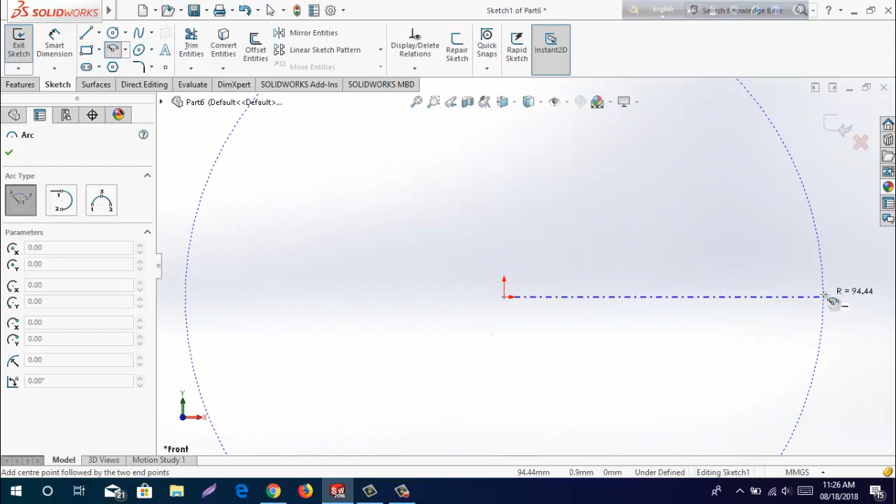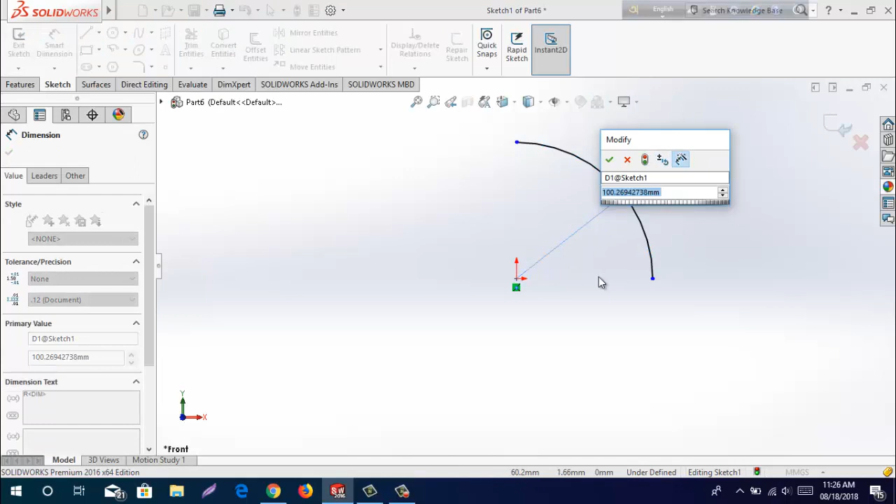Now we are going to draw an arc. Select center point arc and select the origin point, and we are going to make the arc from here to here. Select smart dimension and keep the dimension of this arc 120 millimeter, then select OK and sketch out.

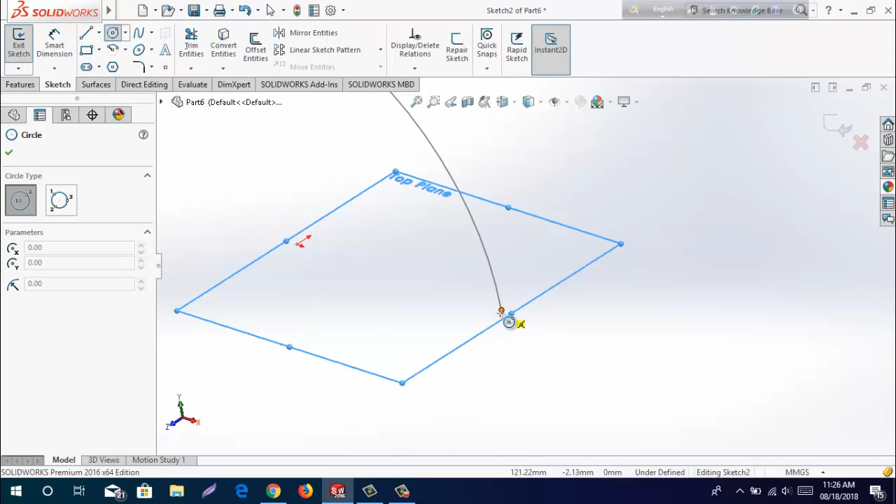Now select top plane and sketch. Draw a circle: select circle and select this point and make a circle. Put the dimension, so select smart dimension and keep the diameter of this circle 60 millimeter. Now OK and sketch out.

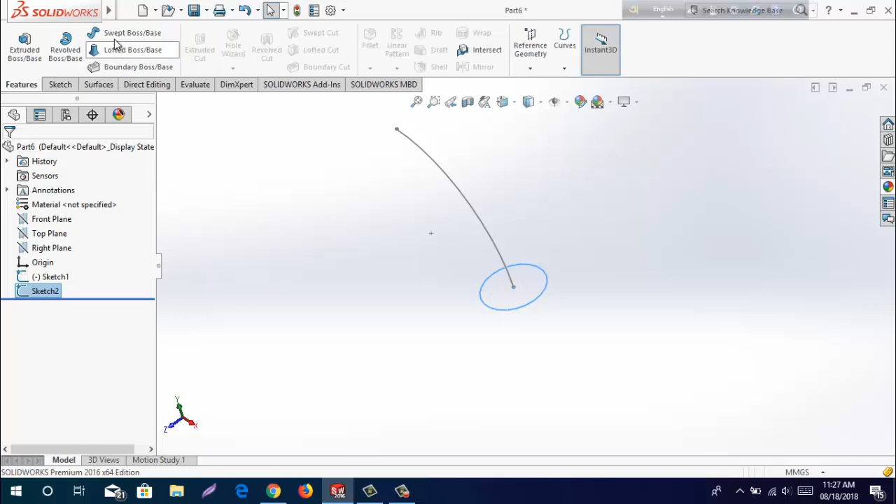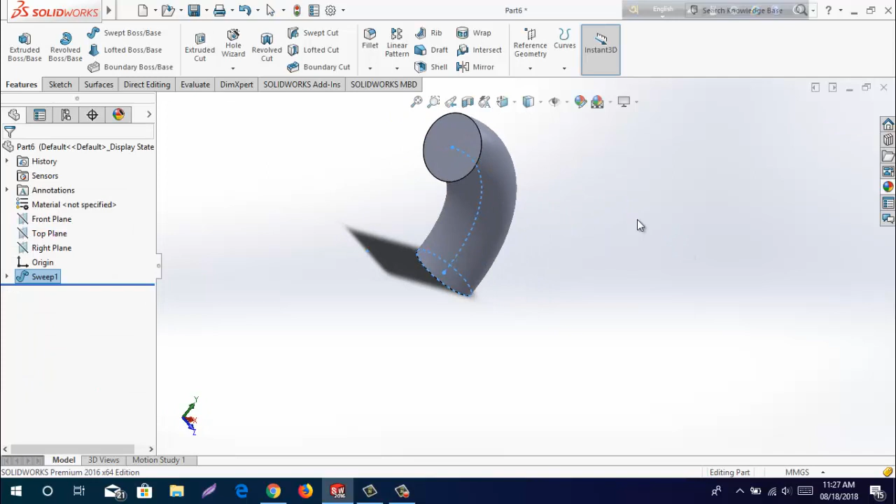Now from feature select swept boss and base, and see the circle is automatically selected here. From the second option select path, and we are going to select the arc, and see our body is almost ready. Now we need to shell the parts.

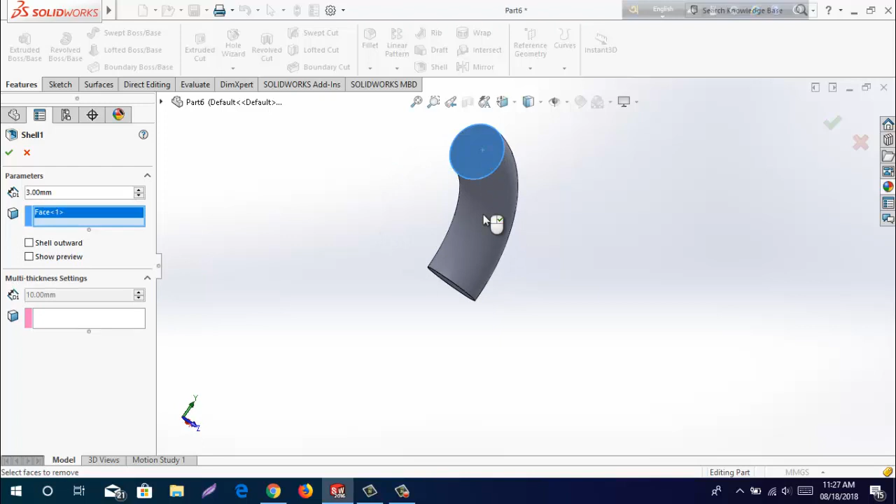Select shell from here and keep the parameters 3 millimeter, and select the faces we are going to shell. So select this face and this face. Now select OK.

Now see, our elbow is almost ready.

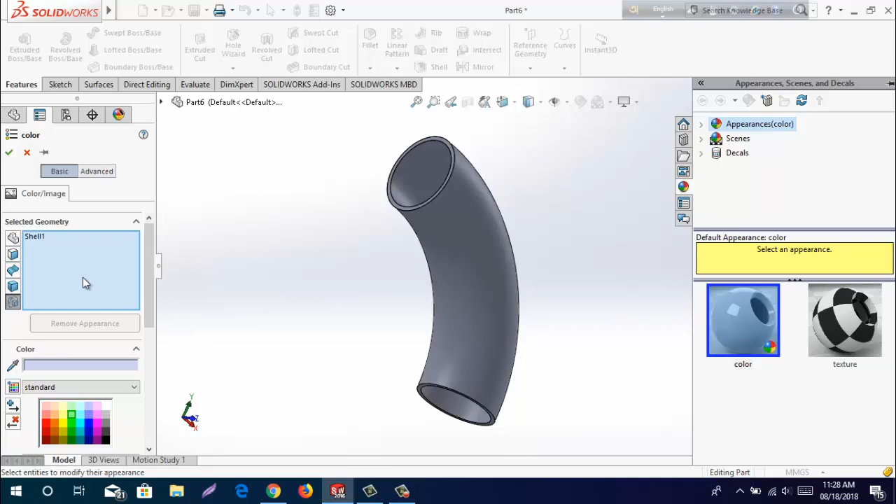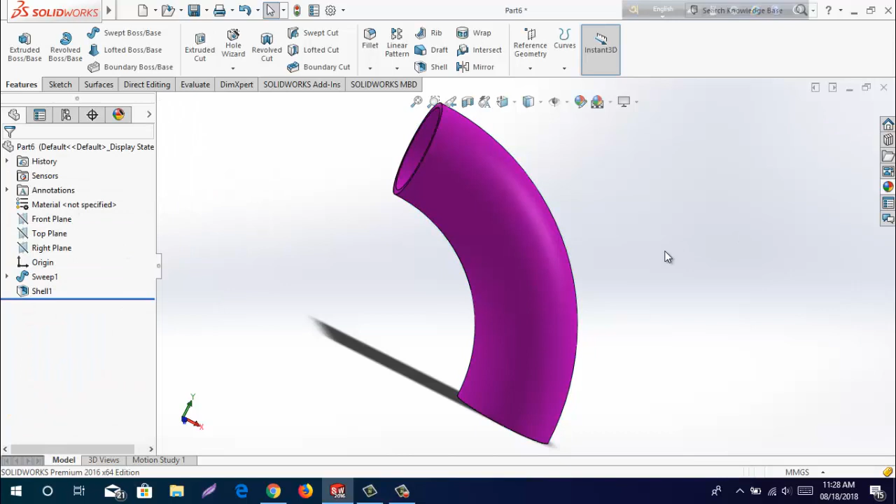Now define some color. So select appearance and select the geometry, shell and sweep also. Now from here select color. See, now select OK. See, our elbow is almost ready.